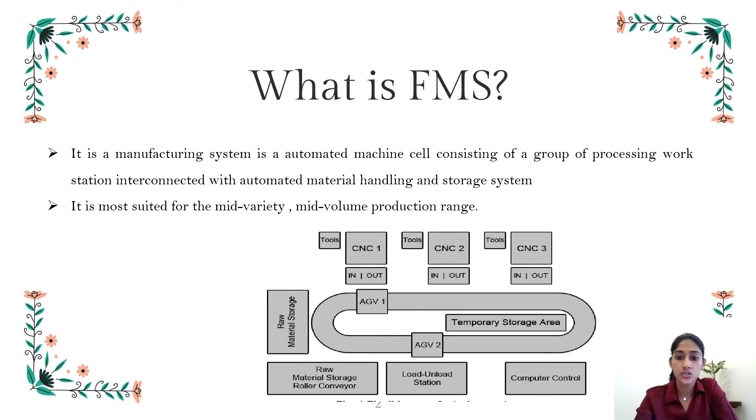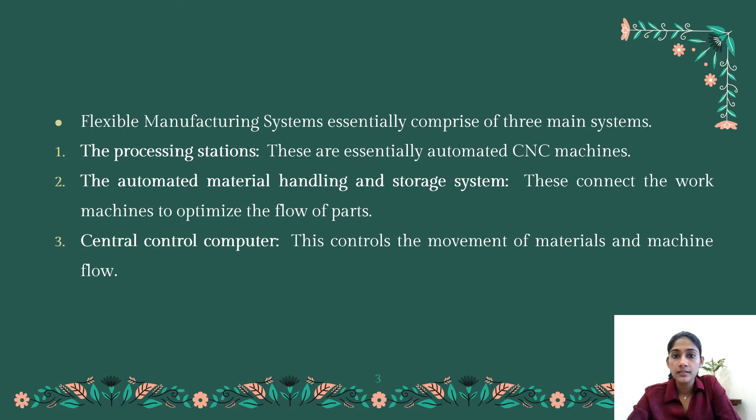FMS comprises three main systems: the first is the processing station, the second is the automated material handling and storage system, and the last is the central control computer. The processing stations are essentially automated CNC machines, and the automated material handling storage system is connected to the work machines to optimize the flow of parts. The central computer controls the movement of material and machine flow.

There are different types of FMS: sequential FMS, random FMS, dedicated FMS, engineered FMS, and the last one is modular FMS.

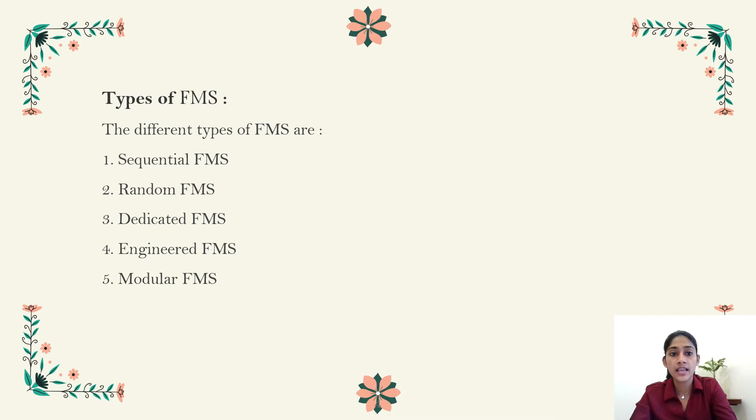So what is meant by sequential FMS? It produces one piece part batches and then plans and prepares for the production of the following piece part batches. It functions like a flexible small batches transfer line.

The second one is random FMS. It manufactures any random mix of piece part types at one time, producing random combinations of different part kinds at once.

The third one is dedicated FMS. It constantly produces the same constrained mix of piece part batch types over a period of time.

The fourth one is engineered FMS. It produces the same assortment of part types over the course of its existence.

The last one is modular FMS. Here, the users can gradually increase the FMS capabilities into any of the previous four categories of FMS.

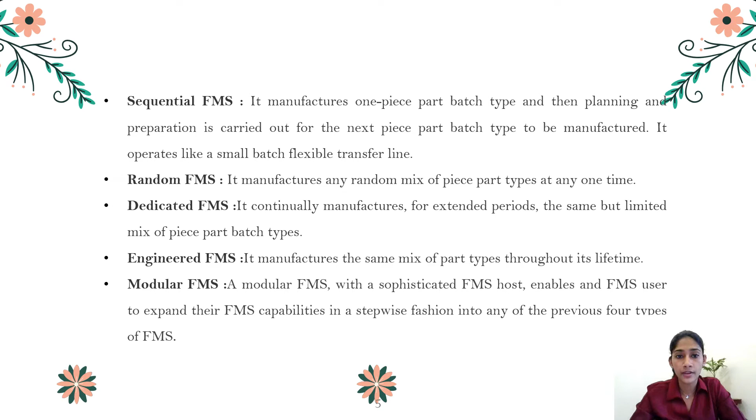There are different types of FMS layout: the first is progressive or line type, the second is loop type, the third is ladder type, the fourth is open field type, and the last is robot centered type.

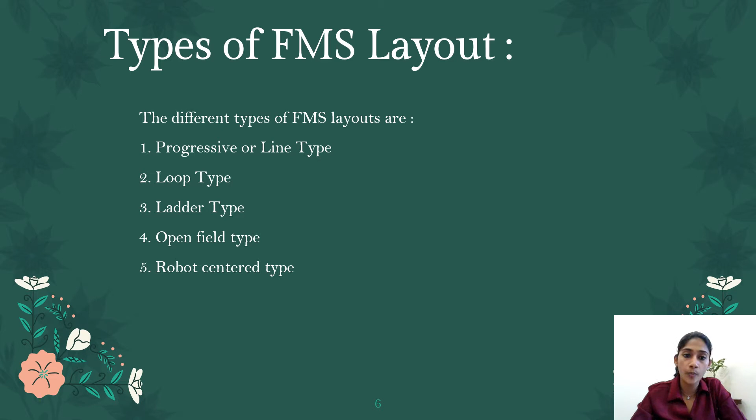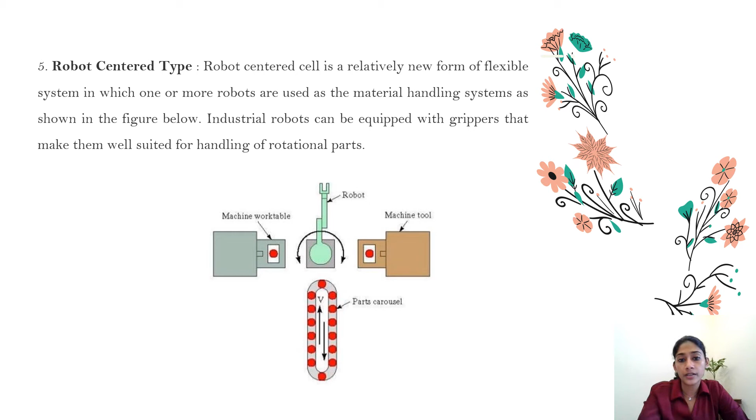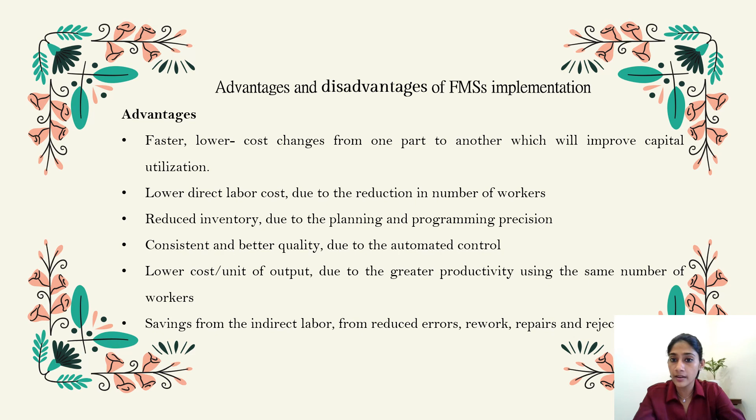Now we move on to the advantages and disadvantages of FMS. It is faster, less expensive, and adjusts from one part to another. It increases capital efficiency, lowers direct labor cost due to reduction in the number of workers, and reduces inventory as a result of careful planning and programming. Due to automated control, it provides consistency and higher quality, and a lower cost per unit of output due to greater productivity using the same number of workers. It also saves on indirect labor, and reduces errors, repairs, reworks and rejections.

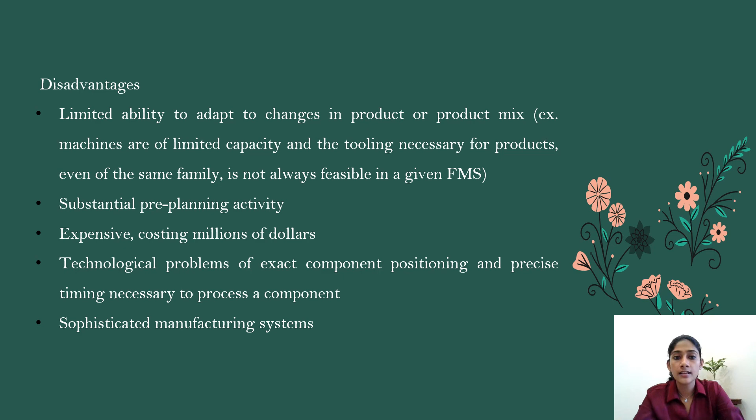The disadvantages of FMS: limited ability to adapt to change in product or product mix, substantial pre-planning activity, and it is expensive. There is also the technological problem of exact component positioning and the precise timing necessary to process a component. The last one is that it is a sophisticated manufacturing system.

There are certain factors influencing FMS: availability of raw materials, proximity to market, transport facility, availability of efficient and cheap labor, availability of power, water and fuel, atmospheric climate conditions, social and recreation facilities, and the last one is business and economic conditions.

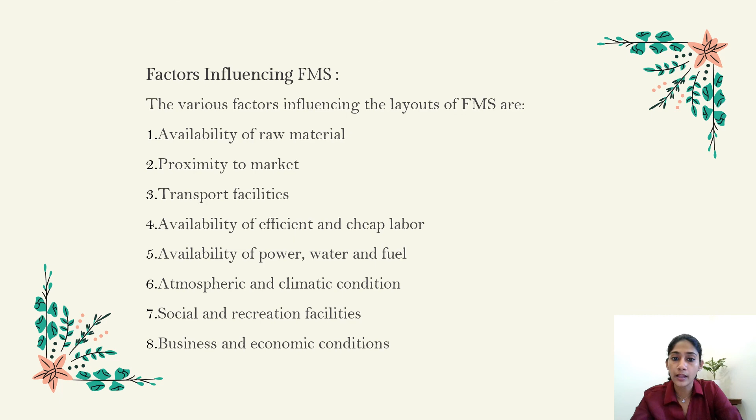To conclude, FMS has been a breakthrough in manufacturing technology, and it was created to satisfy each company's unique requirements. Moreover, FMS is utilized for multitasking purposes, and it requires a very important time and resource commitment.